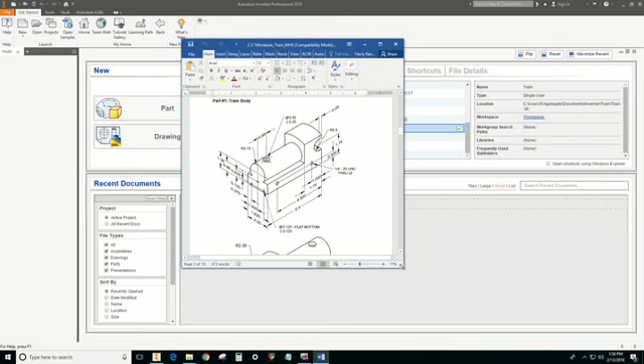So if we take a look at the drawing that we have, notice that there's two isometric views. We're going to take a look at this front profile first, and we're going to extrude that out, and then extrude it back to the cab, and then create the cab.

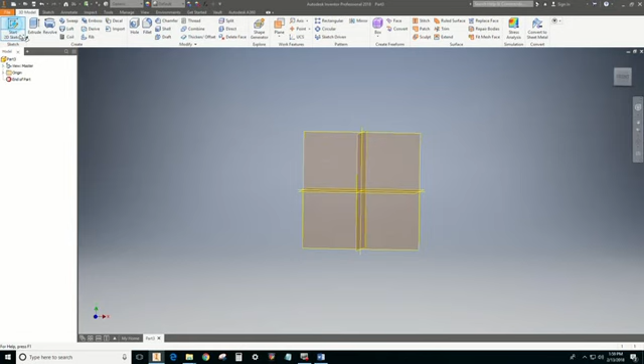So let me make sure we're on the train project here. Pull this off to the side so I don't lose it. Create a part. Make sure you've created your project first. Create sketch. Whenever you're creating your sketches, you want to kind of look at the plane that we're going to be working on. In this case, we're going to be working on this XY plane. We're going to create this front part of this train body, the tank, if you will.

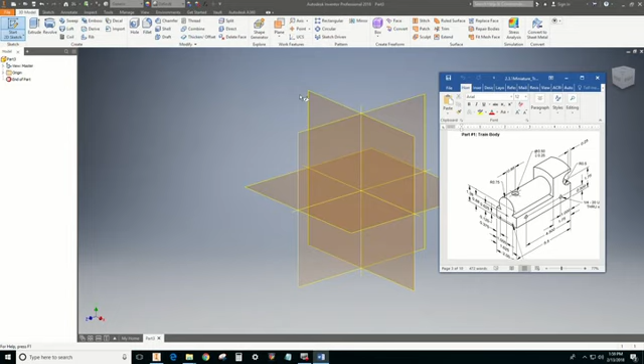You notice that everything's centered off of this small peg hole, this small circle in the front. So we can either do it off of that or off of this main center here for the large circle. Let's try it a couple different ways. Let's go create sketch here, and I'll pull this over to the side a little bit. And if we create this large circle first.

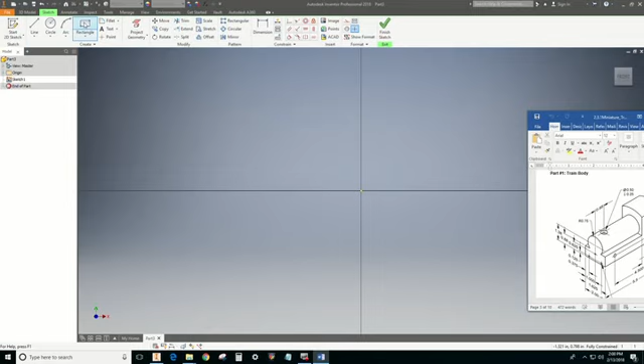Actually, let's start with this rectangle at the bottom. We know that the overall rectangle is 2 inches wide and it's 1.38 inches high. So we'll just create a rectangle, 2 inches wide, tab 1.38 tall. Enter. And that creates a rectangle. It goes off screen, so if we hit front, it'll bring it into image.

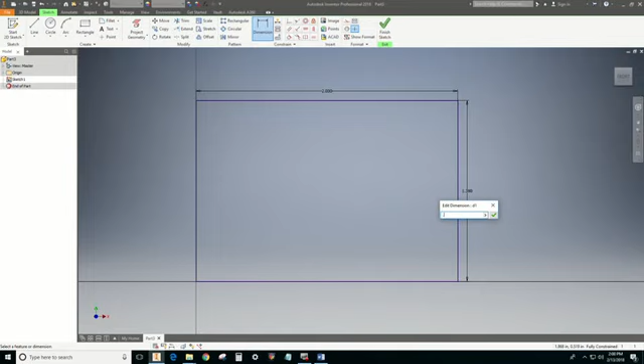Now, see, I got this measurement wrong here. The actual height is only 0.88. So let's go to the dimension, change that to 0.88. And remember, you don't have to type in the inches, just the actual number, because we're in inches by default. So we have our centerpiece here.

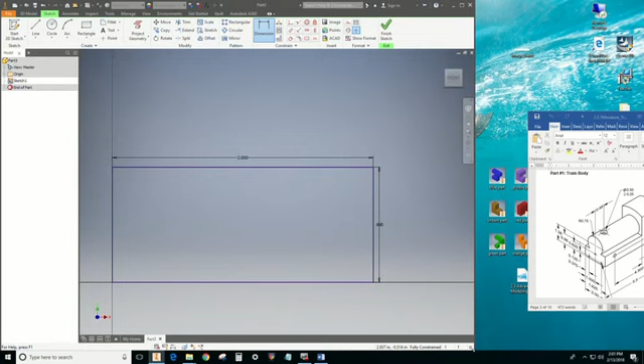Let's shrink this down a little. This is the beauty about having two screens to work with—you don't have to shrink your workspace. There we go. Now we got the dimensions to see what we're looking at here.

So I've got these three little circles that we have to create. They could be holes, but right now we just need to create the profile. So I want to put this top circle on top of this rectangle. Notice that it doesn't go all the way down, so I'm going to use a construction line and go from the center, find my snap of the center, and go up to the center point of that circle, which is 1.38.

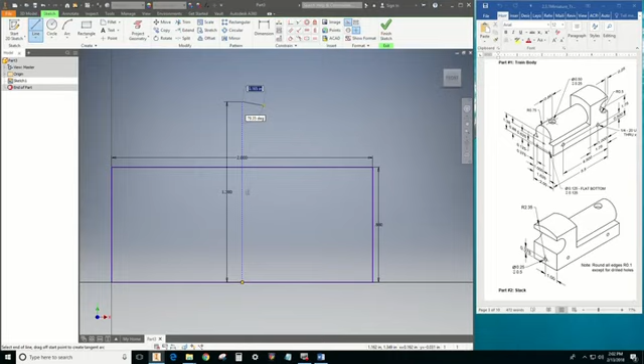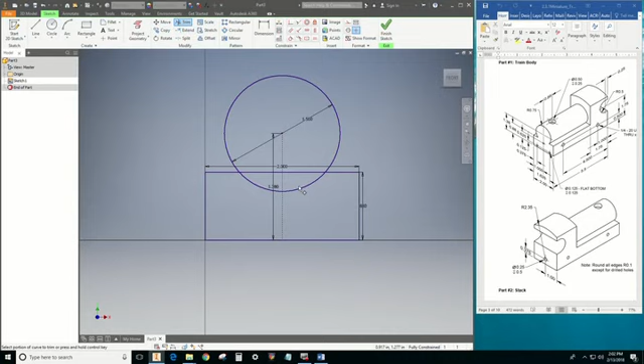Now, at this point is where we can start our circle, so we're going to use the circle command. Don't need it to be a construction. And we have a radius of 0.75. So if the radius is 0.75, that means the whole diameter is 1.5, right? Twice the radius. Enter. Now we can use our trim, trim away what we don't need. Finish the sketch, and we have the front profile.

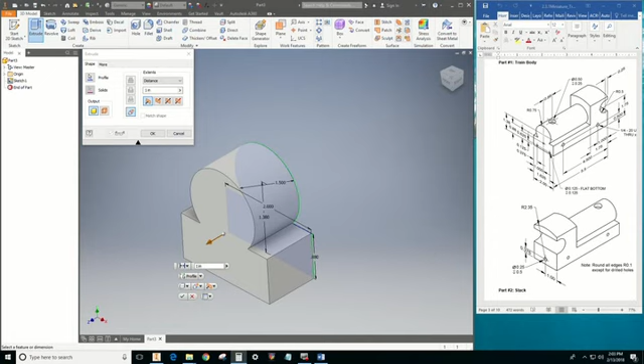Now we can extrude this profile the distance that we need to go back, which the overall distance is 5.5. The distance of this, just the cab, is 1.75. So 5.5 minus 1.75 equals 3.75. That's what we're going to extrude at 3.75.

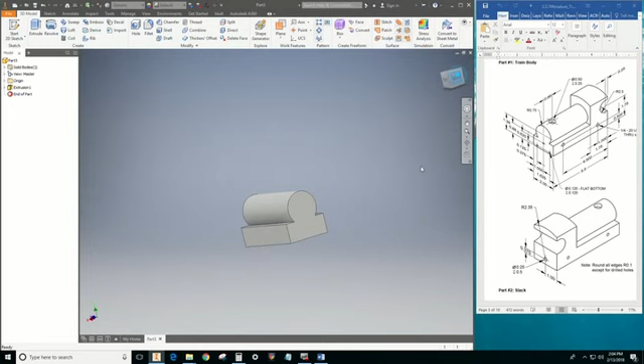Let's go the other way just to make things all copacetic. Okay, so there's our profile of the cab, or the profile of the tank. Now we go around to the back side and we're going to sketch this on the bottom isometric view. We're going to sketch this profile. We know that the bottom's the same, so let's take a look at this thing.

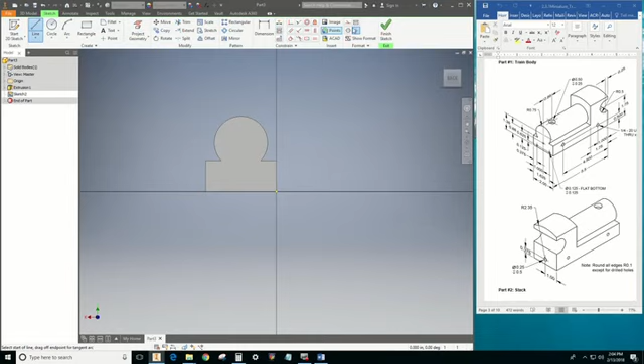Create a sketch, and we have a radius of this top, which is 2.35, but it's from this center point, which is 0.375 up. So let's do a construction line.

0.375. Escape. The top of this is our radius point for our circle.

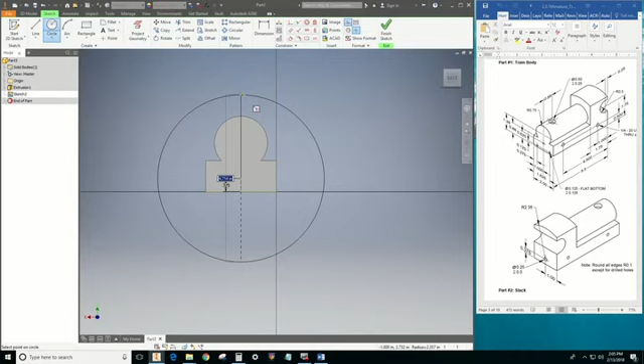Well, there's another way to do this. We could do it just by drawing an arc. The radius of this top is 2.35, so the diameter is going to be 4.70.

Now we just need to finish. Edit the sketch. This line needs to be not a construction line.

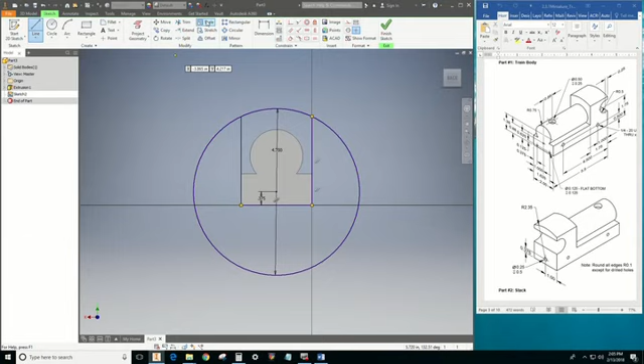Now we just go straight up, straight up, and cross over. Trim out what we don't want. Finish our sketch. And now we have our profile of the back that we need to extrude.

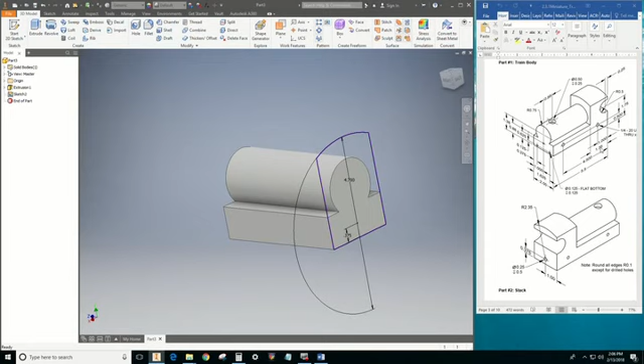How deep is this cab? Well, we know the cab is 1.75, so we're going to extrude. Normally when we extrude, we can extrude that whole shape. Sometimes you might have to select the top part and the bottom part separately, depending on how you constructed it. So we're going to make this 1.75. And there's the rough body of our train.

Now here's where the fun starts to happen. We need to do a cutout through here to make this little groovy window that's in the back. So let's sketch on the side.

And we know that the center of that is 0.125 from the back. Construction line needs to be, I'm sorry, 0.25 from the back. And it needs to be 1.75 up from the bottom. The circle itself has a diameter of half.

So a radius of half, so the diameter is 1. And it needs to be 1.75 up from the bottom.

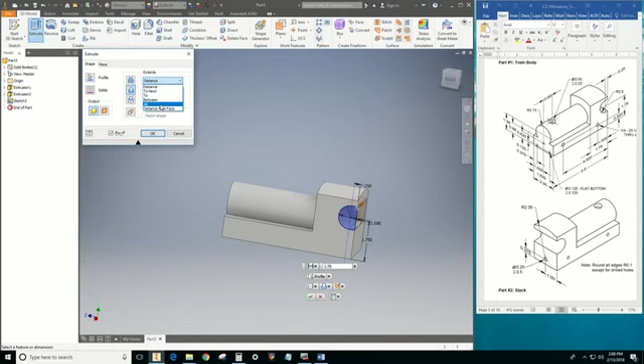Now we can trim away, again, what we don't want. Trim that, trim that, trim that. Finish. Do a cut extrude. Might as well go all. Enter. There's our cutout.

So now we've got the problem for the smokestack that's going to sit in the top. It's got to have a flat bottom. And in order for it to have a flat bottom, we can't do a sketch on this top of this without creating a plane. So the first thing we have to do is create a plane on this surface.

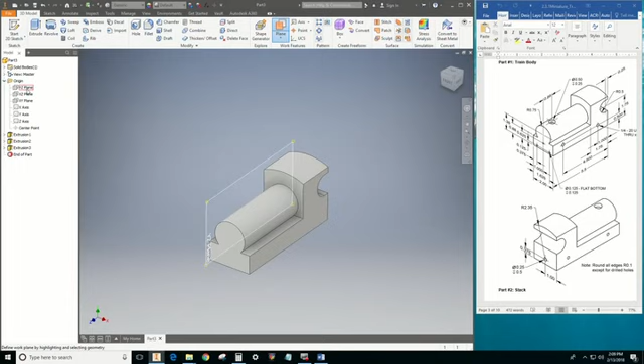So let's take a look at our origins. We want it to be on that XY plane on the surface. See, I'm just touching that surface, that round edge, and it's going to put a plane tangent to that round circle. Just touching the edge of it.

Okay, let's take a break here and make sure we're caught up.

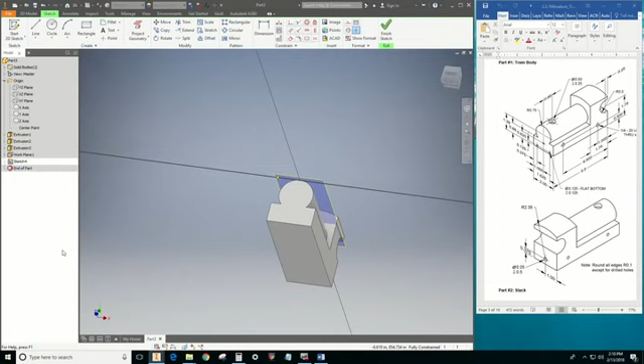Okay, so we got our main body. We're going to create this hole for the smokestack. So we needed to create a tangent plane to this top. Remember, we went to the XY plane. Plane command, XY, and touch the top of this to get this plane. Now we can sketch directly on this plane. And notice that that plane we're sketching on is just perfectly tangent to the top of this train.

So let's go look at the top of this thing. We've got our front edge that we're going to have to measure from. So we want to project that geometry, that front edge. That creates a reference point.

And we've got a circle that is 1/2 inch in diameter, that's a diameter symbol. So we're going to create a circle from the center that's 1/2 inch in diameter, and it needs to go back 0.88. So I'm just going to reference that line, go to the center of the circle, and take it back 0.88.

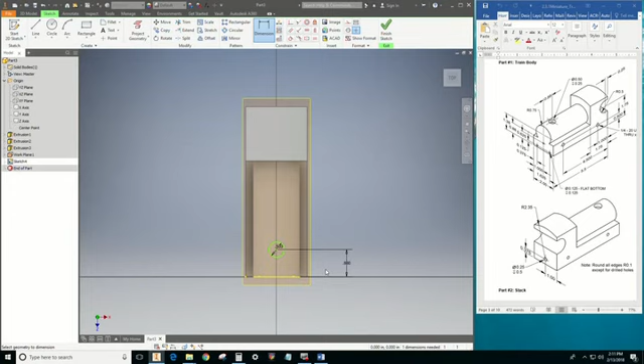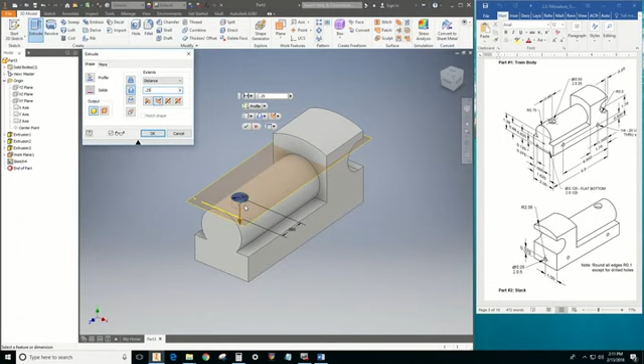Now we can finish the sketch, and we see that our circle here has a depth of 0.25. So we can do a cut extrude, 0.25, and it goes down into the tank. There we go. Now we can turn that work plane off if we don't want to see it.

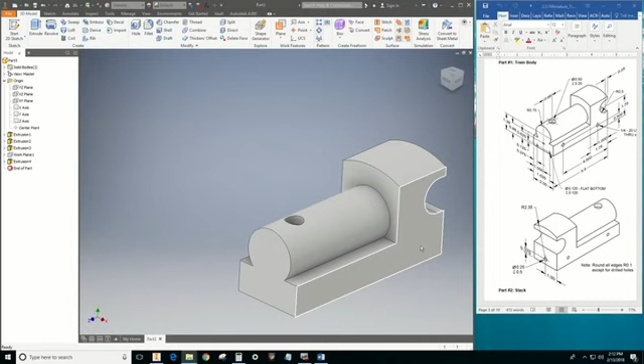Just uncheck the visibility, and we have a flat bottom circle sketched on top of that tank that we can stick the smokestack down into. Okay, so we have pretty much the whole thing done. All we have left is a couple of little holes on the side for the axles, for the axle pegs, the holes on the front for the cow catcher, and that hole on the back for the hitch pin.

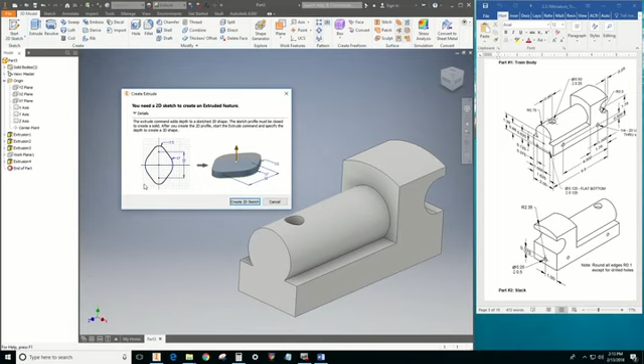So let's take a look at these side holes first. Let's sketch on this face over here. Oops, I don't want to extrude, I want to sketch on this plane, the right face. And we know that they are 3.5 apart if we go from the back side to the front, and then from the back it's 1 inch, so it's 3.5 apart.

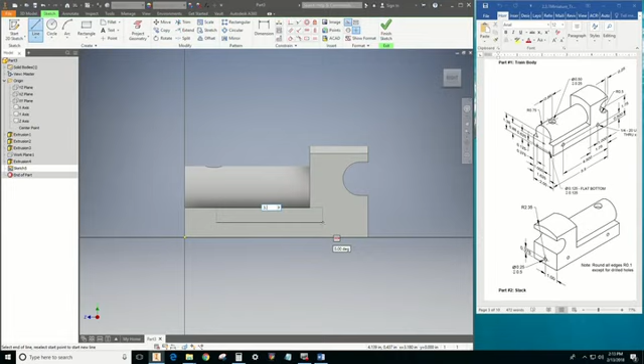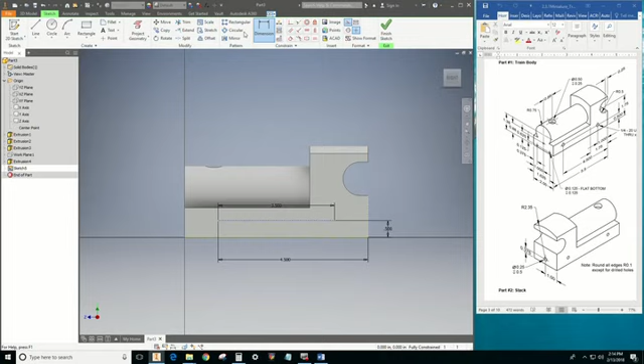So if we create a line that's 3.5, and it's 1/2 inch up from the bottom, and from the back it's 4.5 to the front point. That gives us our 2 endpoints.

So we can finish the sketch, and I'm going to create 2 holes here. Create a hole from centers. We want the hole to go all the way through. Let's make them threaded just for fun, and let's go all the way through. The holes themselves need to be 1/4 inch.

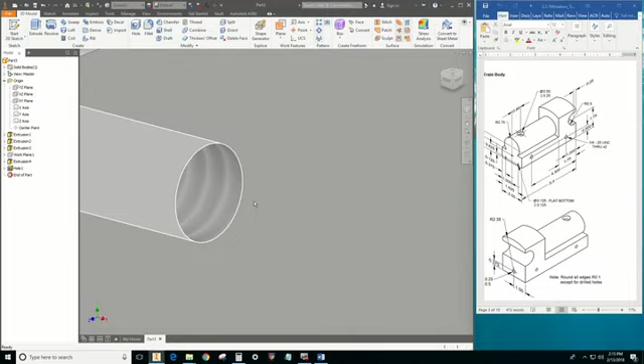Oops, let's take a look at this. So they are threaded, 1/4 inch UNC, all the way through. So we're going to select threaded, 1/4 inch UNC is already selected, and we want to go full depth, so the centers. And we hit OK. Now if we take a look at this, zoom in, you can see those are threaded holes all the way through.

Alright, so the front and the back holes don't need to be threaded, so we can just create circles for those. So let's start with this front face. We're going to create 3 little circles that are 0.125 in diameter. Point 125. 0.125. And 0.125. It doesn't matter where they are yet.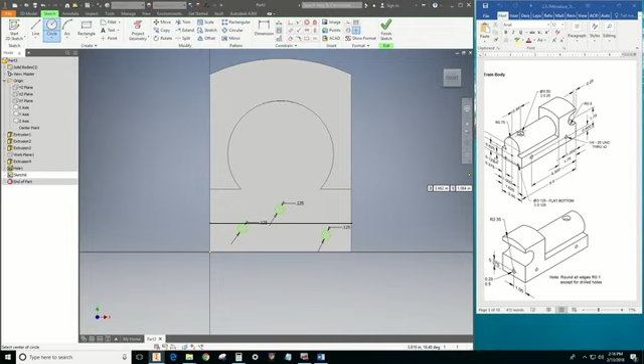We're going to make them in sync. So we know that up from the bottom, it's 0.125, so let's put a dimension from here to this one, 0.125. We could do the same thing for this one, or we can make them collinear with a horizontal constraint. From the sides, they are 0.375. Project geometry. Point 375.

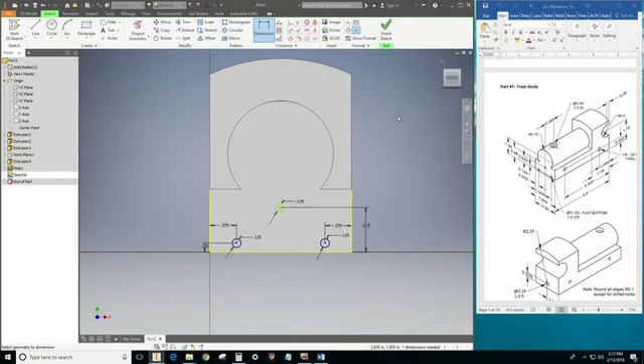.375, and then we need to get this center one, which is 0.625 from the bottom. Enter, finish the sketch. They are 0.125 deep, so cut extrude. 0.125, this one, and that one. So there's our front.

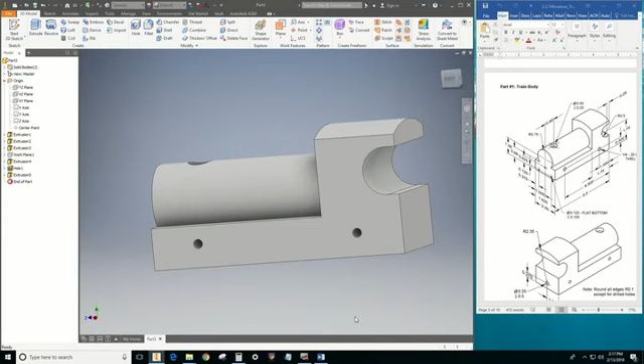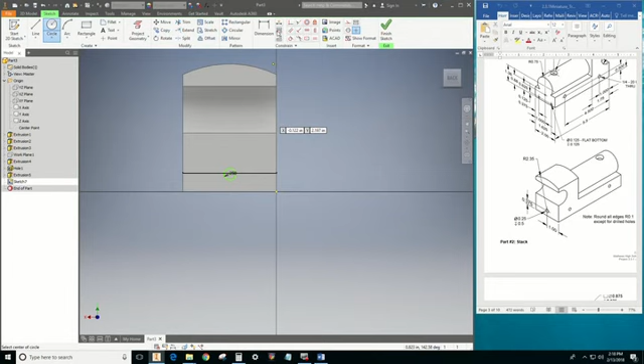Okay, I haven't tried to make my circle align with that stuff, but I haven't got it all. 0.25 in diameter. Finish sketch, I'll go back and get it. Cut extrude, I want to make sure that I've got 0.5 deep, and that I've got all 6. Okay, well, so far it looks good, and we're done with our body.

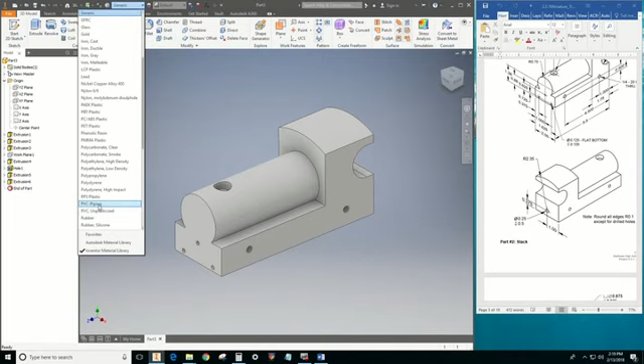Okay, so now you can do cool stuff, but we're pretty much done. I mean, if you want to make it, if we're going to print it on our 3D printer, we'd use PVC and give it a color. And we're done. File, save as, train body.

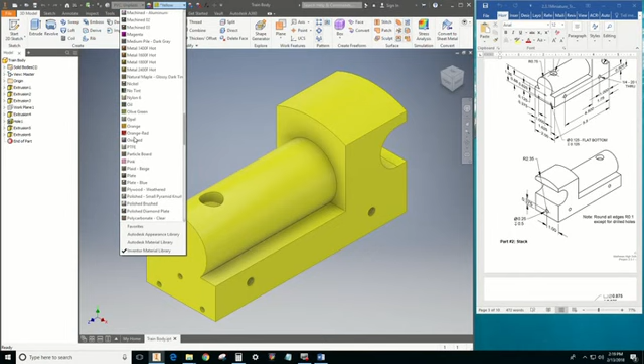Save. Actually, I'm going to make it red. I don't like that. Oh, let's make it blue for Matthews. There we go. And if we want to put a chrome feature, let's make it a chrome tank. There we go. Yeah, we'll make it look cool. All right, so we're good to go. Save, and we're done. That's our train body.